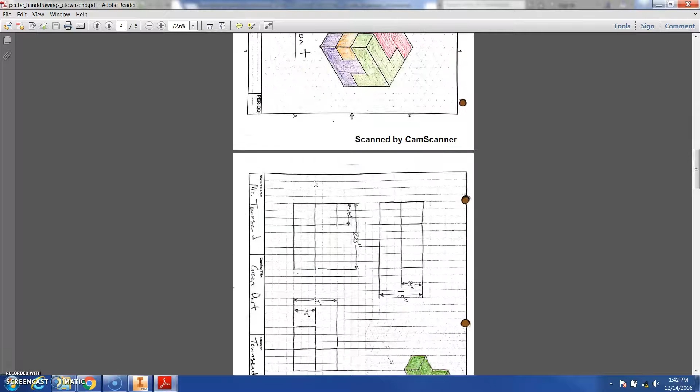The first thing you need to do is take your Puzzle Cube sheet with all your initials on the first and second page, and get that together. Then you need your hand ISO, shaded and colored, and all 5 of your hand-drawn parts - I have green, orange, blue, purple, and red.

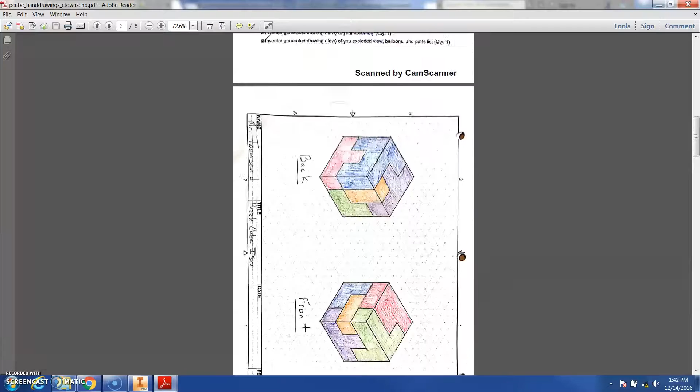You need to put those all in order - I used Cam Scanner, but use whatever scanning application you wish - and scan all of those at once into one single PDF document like I'm showing you here on the screen. So I have an 8-page PDF document.

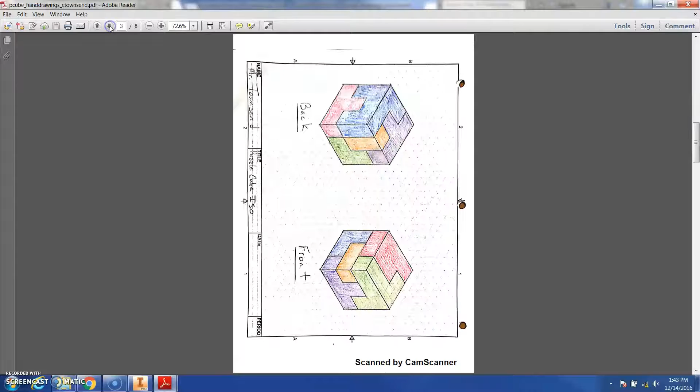Page 1 and page 2 are my Puzzle Cube project sheet with my initials. Page 3 is my hand-drawn ISO with colors, front and back. And 4 through 8 are my individual hand drawings. So that's item number 1 that you need to have done.

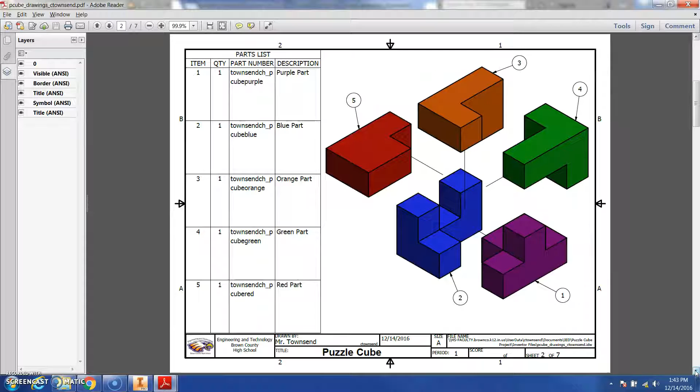The second item you need is your PDF document of all your Inventor drawings. The first page will be your cover page, then your exploded view with parts list and balloons, and then each of your Inventor-generated orthographic drawings with dimensions. That is the second file you need to create.

If you didn't create that after watching the last video, you need to be in Inventor with your drawings opened up. Notice I have all of my drawings here in my browser in one single document: cover page, exploded view, blue part, purple part, orange part, green part, and red part. To export as a PDF, go to iPro, Export, PDF.

Give it a second to load. Mine's already named correctly because I've already saved it, but don't just click Save here - go to the Options tab and make sure that all sheets is selected, not just current sheet. If you select all sheets and OK and save, it'll save out to here. I'm going to hit Cancel because I already have mine saved. That PDF document will be your second file.

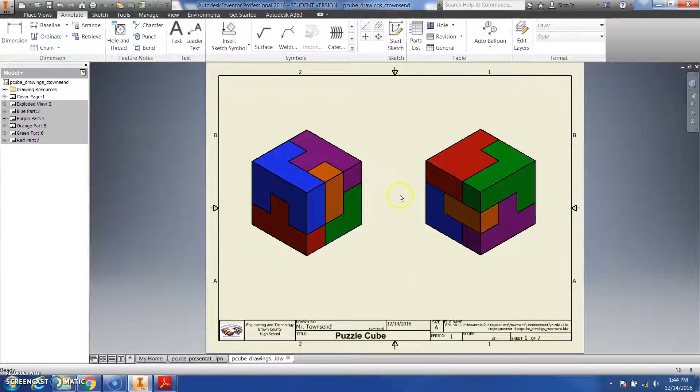I'm going to minimize this. Your third file, if you go into your Puzzle Cube folder, will be this pcube_animation_firstinitiallastname, and it is a Windows media file or WMV file. That'll be the third file you'll submit.

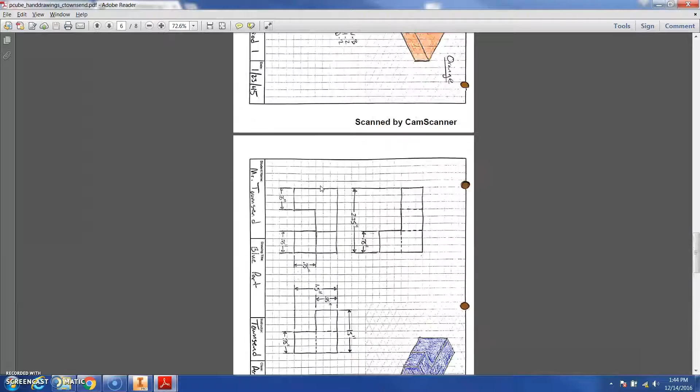So the first thing you need is all of your scanned drawings, hand ISO, and your project sheet with your initials - that's number 1. Number 2 is your PDF of all of your Inventor drawings. And number 3 is that animation file. I have the animation saved here, my PDF saved here, and my hand drawing scan saved in my Puzzle Cube project folder as well.

Once you have all those together, go to our Canvas course, to the home page. Scroll all the way to the bottom and go to 4.2 Project, Puzzle Cube Design. You'll see this one is due December 16th, and it's worth 200 points. I'll go ahead and click on that.

Since I already have all my files ready to go, I'm going to click Submit Assignment, Choose File. The first thing I am going to grab is my hand drawings, which is pcube_handdrawings_ctownsend. I'm going to click Open, and it'll show that there, and submit that assignment.

And I have 2 other files to do. I could have added another file here and hit Submit, and I'll show you that in a second. But if you accidentally just submitted that and have a couple more to do, all you have to do is click Resubmit.

I'm going to choose the file, and the second one is going to be my PDF of all my Inventor drawings. Click open, then click add another file, and choose my animation file, which is my WMV file, called pcube_animation_firstinitiallastname. I'm going to select that, hit open, and hit submit assignment.